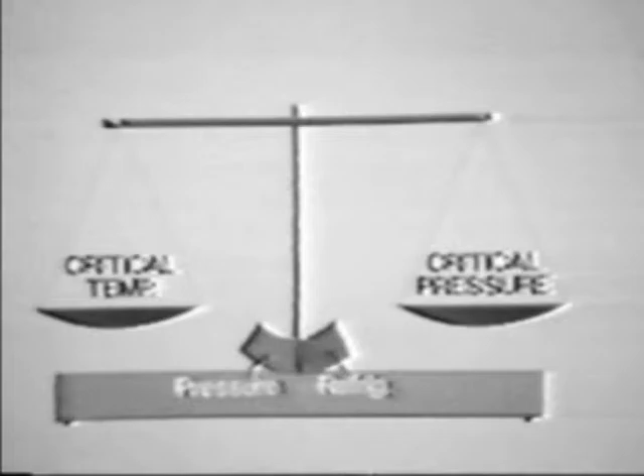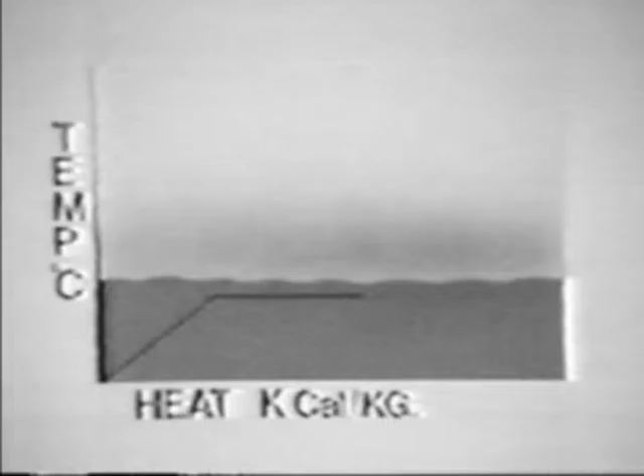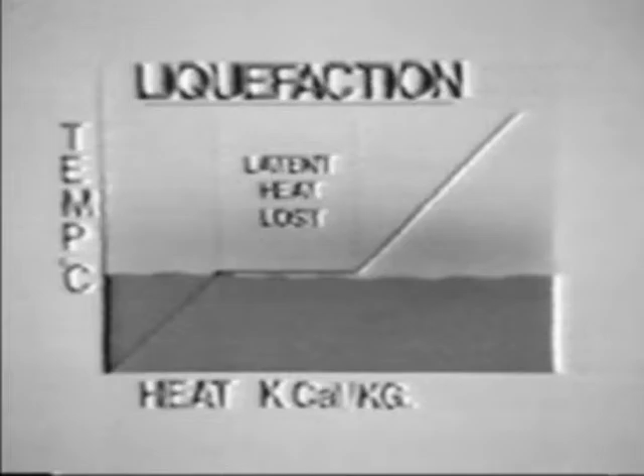How liquefaction of a gas is achieved depends upon its critical temperature and its critical pressure. Critical temperature is the temperature above which a gas will not liquefy under pressure alone. This means, in practical terms, if the actual temperature of a gas is above its critical temperature, it must be cooled below this temperature before pressurization can turn the gas into a liquid. That is, allow liquefaction to take place.

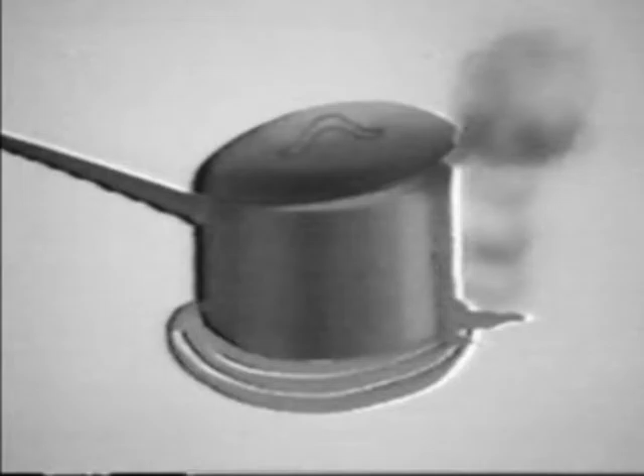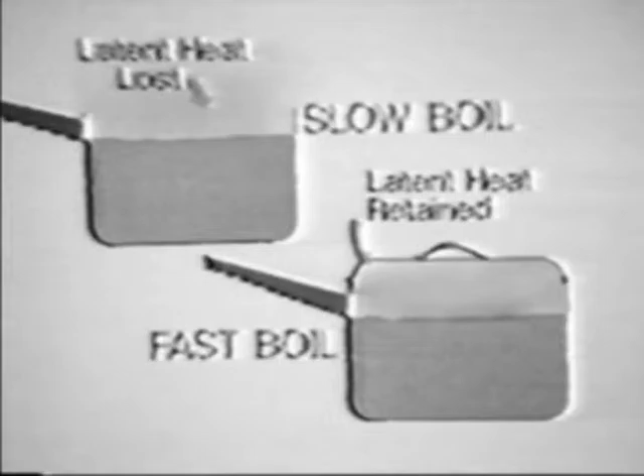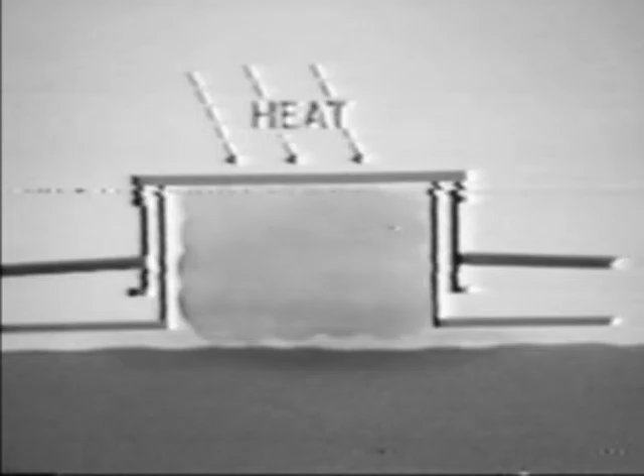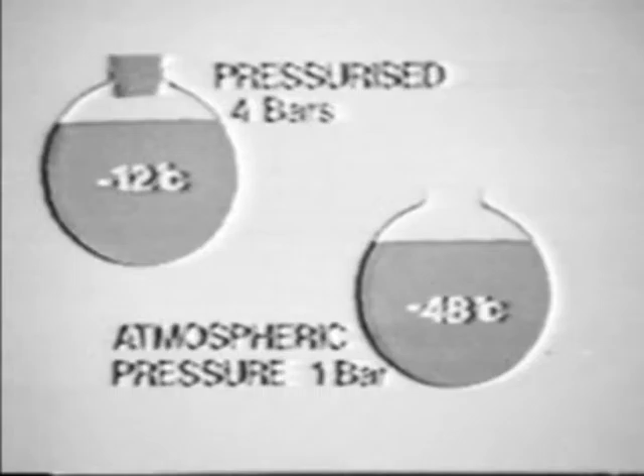It's the balance between critical temperature and critical pressure which determines the liquefaction methods that can be employed for any particular gas, such as full pressurization, full refrigeration, or a combination of both as utilized in the semi-pressurized, semi-refrigerated ship. However, consideration must also be given to the other properties which we'll now discuss.

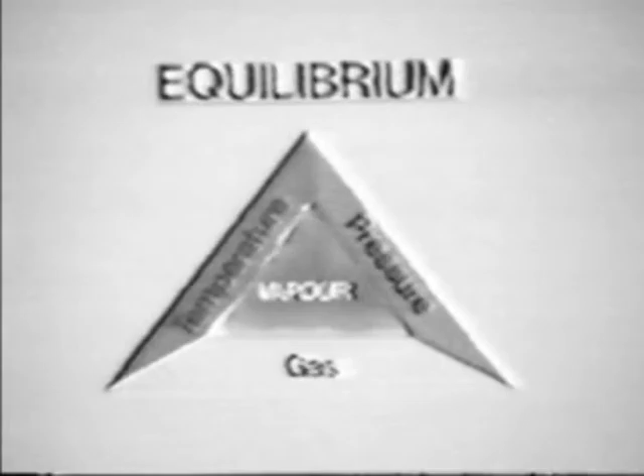Whatever method we use to liquefy our cargo, the gas and its surrounding environment will experience changes in temperature. In using fully refrigerated or semi-refrigerated techniques, we'll be deliberately causing the cargo temperature to change. It's therefore essential that we have a full understanding of the theory of heat transfer. The transfer of heat to or from a liquid gas gives rise to two significant physical changes: change in temperature and change of state from liquid to gas, or vice versa. These changes, of course, don't occur simultaneously.

As heat is transferred to the liquid, the temperature rises. At a certain stage, that is, just prior to boiling, the temperature ceases to rise, though the liquid continues to absorb heat. A further stage is then reached at which the liquid boils or vaporizes, and the temperature of the gas vapor, now no longer a liquid, continues to rise.

The heat that is absorbed by the liquid gas prior to boiling, without change of temperature, is known as hidden or latent heat. More specifically, it's known as the latent heat of vaporization. A similar phenomenon occurs in reverse during liquefaction. This time, latent heat is given up by the gas vapor just before it condenses to a liquid.